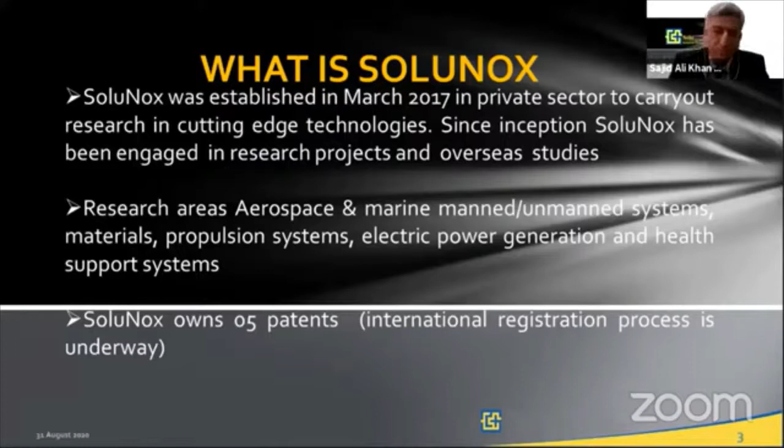SoluNox, before we started this process of establishing the company, we were stepping into cutting-edge technologies. So we had to design and analyze what all major companies in the related field have progressed, right from the scratch.

To do this, we studied and analyzed those companies, and collected a lot of knowledge sources: research materials, patents, online libraries. We also took membership of professional organizations, as I mentioned at the start of the presentation - member of the American Society of Mechanical Engineers, American Society of Testing Materials, and Royal Institute of Naval Architects UK. SoluNox is also a member of 3 committees for formulation of standards at ASTM.

Moreover, to strengthen our company, we have concluded some R&D collaboration agreements with universities, academia, and other companies across 3 continents. We have contracted technology partnerships, mainly strategic ones, based on sharing of our research together.

We are now registered as a supplier in some renowned aerospace directories, so that we have direct access to companies globally. Moreover, we have networked into industry also, because the type of industry we are working in at the moment needs a lot of precision and very dedicated design processes. So we have done this networking with companies.

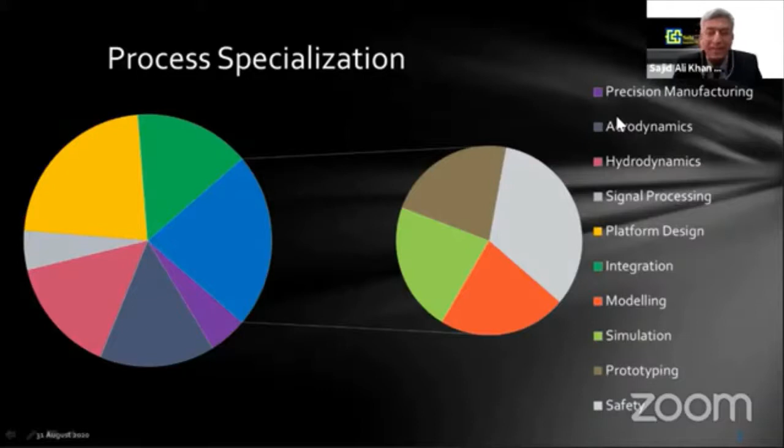In terms of technical specifications, our products are smart products. We have focused our attention towards propulsion systems, automation and control systems, and system integration. We have some process specializations because we involve precision manufacturing. We develop our expertise in aerodynamics, hydrodynamics, signal processing, platform design, integration, modeling, simulation, prototyping, and in the end, major part is the safety of all these systems.

Now, coming to your second part, how I started this process of aerospace despite being in the Navy and serving in submarines. Just for your information, I started my career as an aeronautical engineer, but somehow a turn of events took me to the Navy, and eventually I ended up getting commission in Pakistan Navy, then joining submarine service. The submarine service itself is a cutting-edge technology. So in a way, I'm working at the moment on 2 extreme technologies - aerospace and submarines. Rest in between is mediocre technology in that sense.

As for your question on how I came into developing gas turbines and everything - our study did not start all of a sudden. We have a team who have been working for quite some time, but in their own capacities in gas turbine technologies or aerospace technologies. Our main effort was to bring them onto one platform under SoluNox. But now, specifically for the turbines...

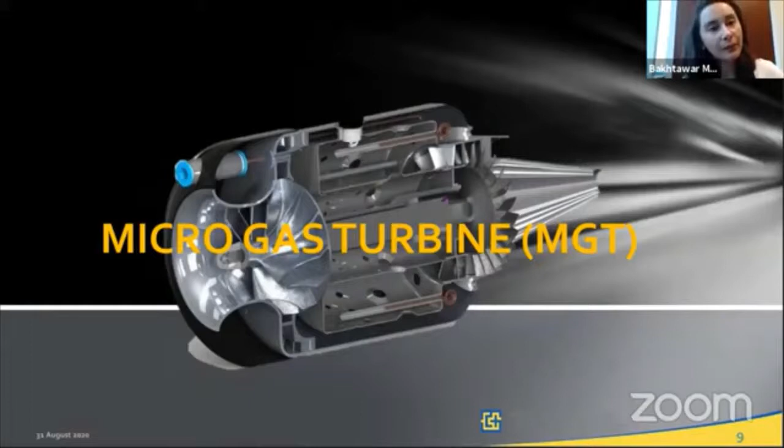Okay, just for the start, I'm sure all experienced from aerospace are sitting here, but as you said, some may not be related to this engineering background. Basically, a gas turbine is a heat engine with continuous flow. In comparison, reciprocating engines use pulsating flows. These turbines have a compressor, a turbine, and a combustion chamber, where heat is applied in different modes through fuel injection, and new methods are coming for adding heat to the combustion chamber. In this type of engine, generally they are mounted on the same shaft.

Micro gas turbines generally are mounted on the same shaft, and that is why they are popular in this part of the world of aerospace. At the moment, there is no standard definition of micro gas turbine. Initially it was considered that under 1 megawatt would be a micro gas turbine, but subsequently this definition was worked out further by many engineering associations and countries. So at the moment, a turbine under 400 kilowatts is graded as a micro gas turbine.

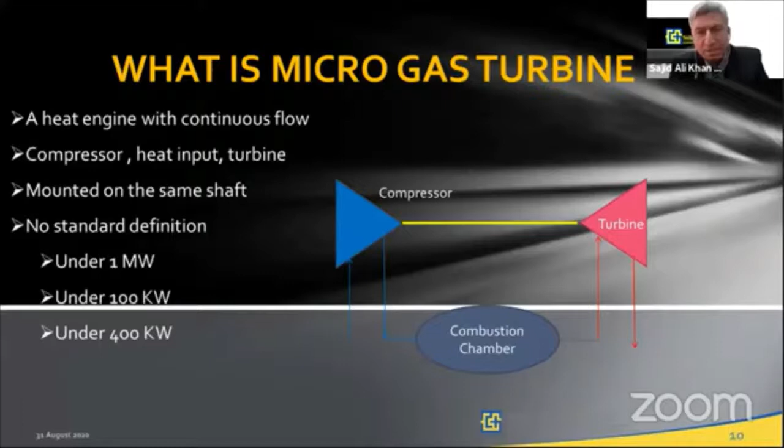And these micro gas turbines, you can see in the process cycle, follow a Brayton cycle. In this process, the compressor raises the air pressure, and from process 1 to 2, it is directed to the combustion chamber, where heat is added via fuel combustion through a heat exchanger or concentrated solar power. Heat is added, and then again in the turbine, at process 3 to 4, expansion takes place to produce power.

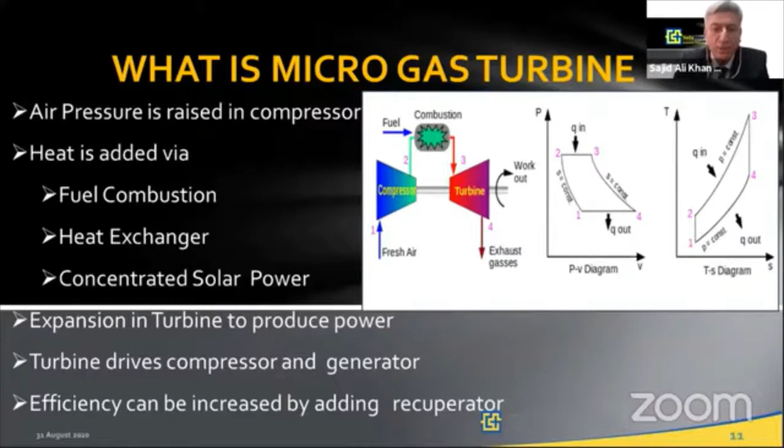This turbine drives the compressor and generator. The efficiency of these turbines can be improved by a recuperator on the return cycle, to increase the temperature in the combustion chamber so that economy of fuel can be achieved.

Now some of the historic perspective related to micro gas turbines. As I said during my presentation, development started in the 1980s. It is not a new subject basically. The drive for this development was the automotive industry, because at that time the automotive industry was looking for an alternative to reciprocating engines, mainly because of fuel flexibility, reliability, and low emissions in micro gas turbines. However, at that time, for some reason, this did not get attraction.

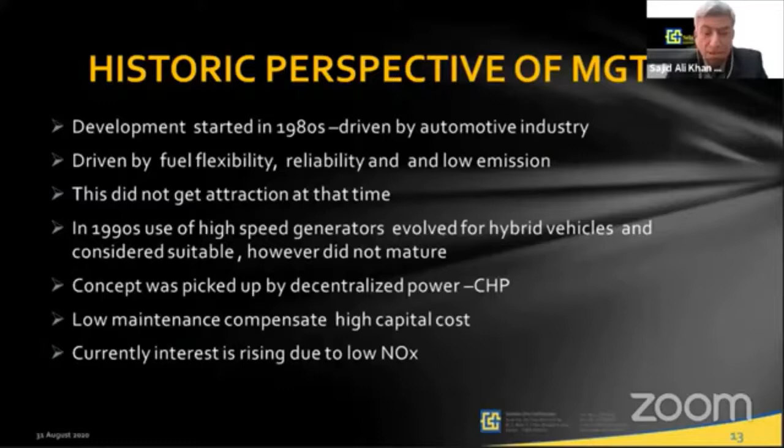But again in the 1990s, use of high-speed generators evolved, and interest also developed in hybrid vehicles, where it was considered suitable. Subsequently, the concept was picked up again for decentralized power in 2014, when the European Union and UNFCCC declared standards for low emission in the atmosphere. The important part of micro gas turbines is that they have low maintenance, which compensates for high capital cost. Currently, interest is rising due to low NOx in these gas turbines, and interest is developing now.

So the first design process starts from the Brayton cycle, and in this process various elements of gas turbine design are finalized, generally mass flow and the temperature ranges at different stations in the gas turbine. At the same time, selection of material is also done. Again, just for repetition, it is an iterative process, with continuous back and forth movement between the designer and the end user, until a suitable compromise is reached. And then you'll see that every micro gas turbine has some auxiliary systems.

This auxiliary system is again a process. It undergoes an iterative process during the design, and then engine control units control the complete process, because these gas turbines cannot be controlled manually for sure. So to make them smart and efficient, these engine control units are becoming smarter now.

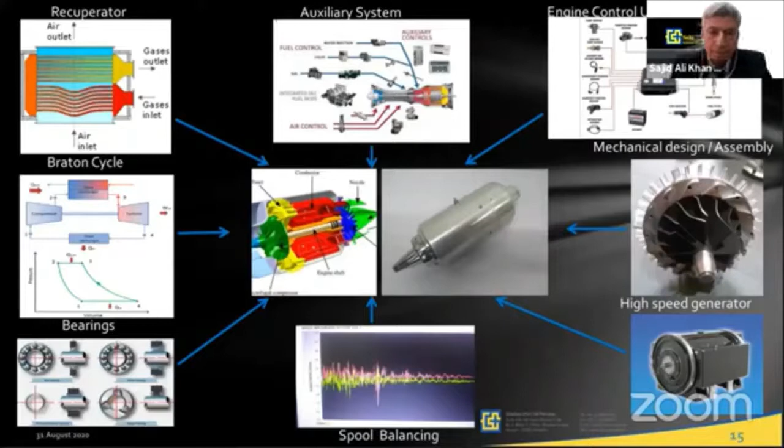Okay, now let's move to some of the parts which we manufacture in our facility.

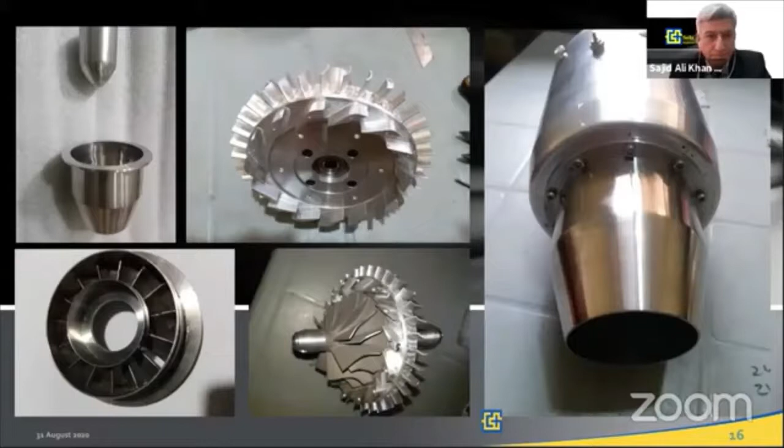These are two versions, SLX 120 NP and SLX 180 NP. They are 120 Newton and 180 Newton respectively. Our research is continuing, and we have plans to further improve these systems for relatively higher powers.

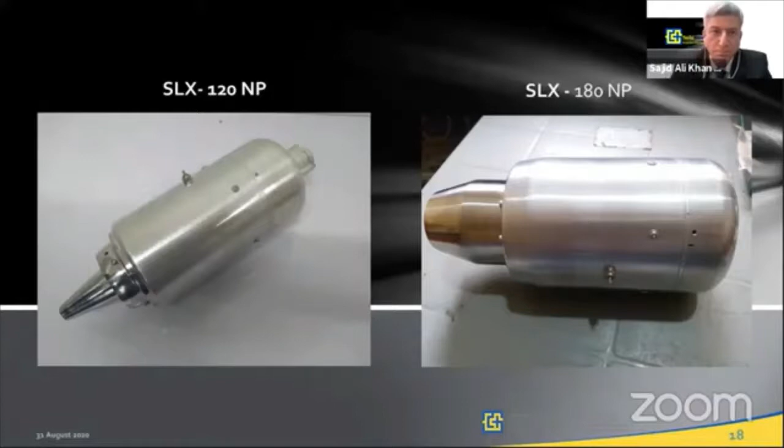You'll see our video running. These technologies are already matured enough, and we are running the engine, so our team, mashallah, has done enough good job on this—they can control it. So you were not using any kind of actuators in this process? No, correct. Please continue.

It is a thermal cycle. It is a thermal cycle.

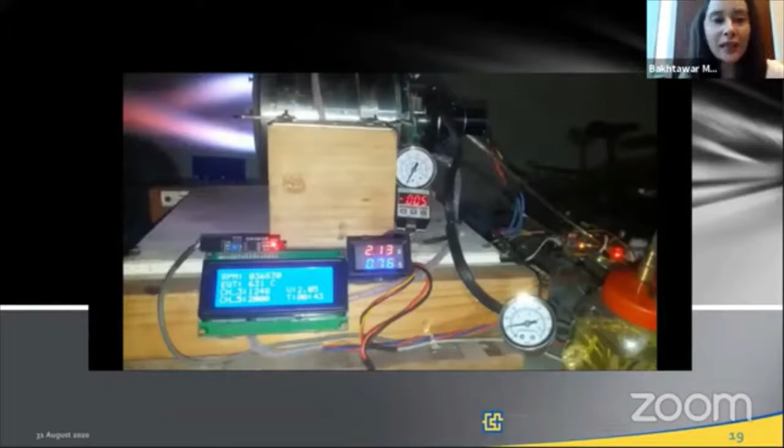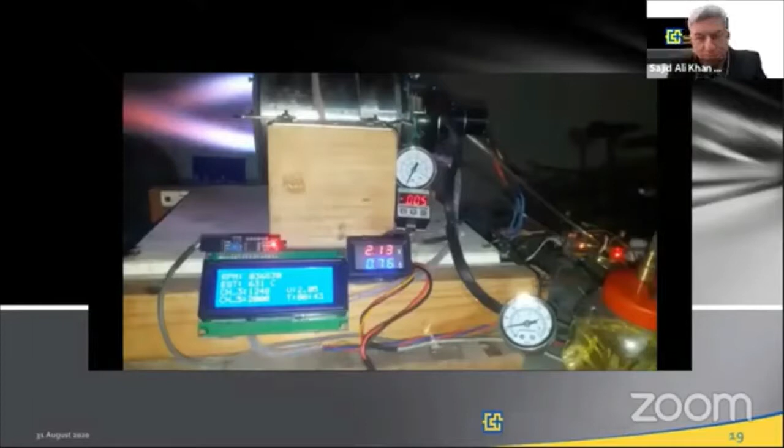Okay, so this is one of the pictures taken during a test conducted, and it is a running engine. You can maybe see the RPMs and the temperature in the digital display of this picture, and this is just the startup, not full power. May I move now? Next.

Now coming to technical specifications. We have developed 120 Newton and 180 Newton versions, and according to our studies we are planning to go to 800 Newton in the near future. We can have electrical output from 3 to 500 kilowatt electrical, thermal output from 3 to 1500 kilowatt thermal, and exhaust gas temperature up to 850 degrees centigrade.

We have fuel flexibility of using natural gas, sour gas, gasoline, kerosene, diesel fuel, biofuels, etc. We are targeting electrical efficiency from 23 to 40%, whereas total efficiency in CHP mode from 80 to 90%.

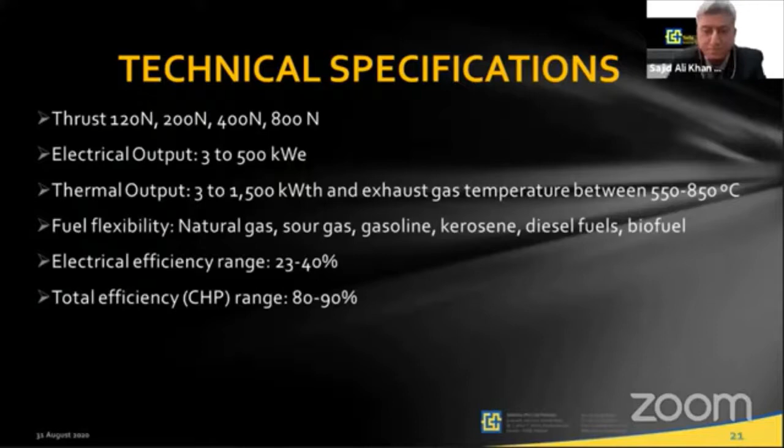Reliability and life: these turbines have been designed to work 40,000 to 80,000 hours with overhaul, and emission targeting below 3 ppm for NOx on fossil fuels comparatively—this will be our range. And the noise level we are maintaining is 50 dBA.

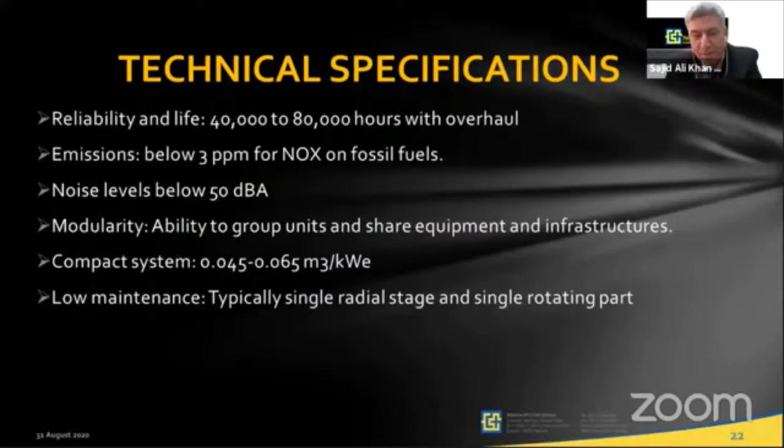These turbines are modular, and the infrastructure is also very modular, easily workable for maintenance. It's a compact system, 0.045 to 0.065 cubic meter per kilowatt electrical. These turbines are low maintenance, typically a single radial stage and single rotating part with no moving parts otherwise. Later you'll see the type of bearings used, where there is no lubrication needed either.

Reliability is high because there are very few parts involved in this gas turbine, so it is very reliable and robust. Compactness comes from the high energy density, use of high-speed generators, and the turbine itself being a very small, compact system to develop modular power up to 50 kilowatts. You can stack up various modules to develop power in multiples of 50 kilowatts.

These have fuel flexibility, and diverse fuels can be used, from jet fuel, diesel, and biofuel. This is the most interesting part in the European Union at the moment, trying to use biofuels. But at the same time, their consumption is low because the NOx emissions are very low, so even on diesel also they are considered very low.

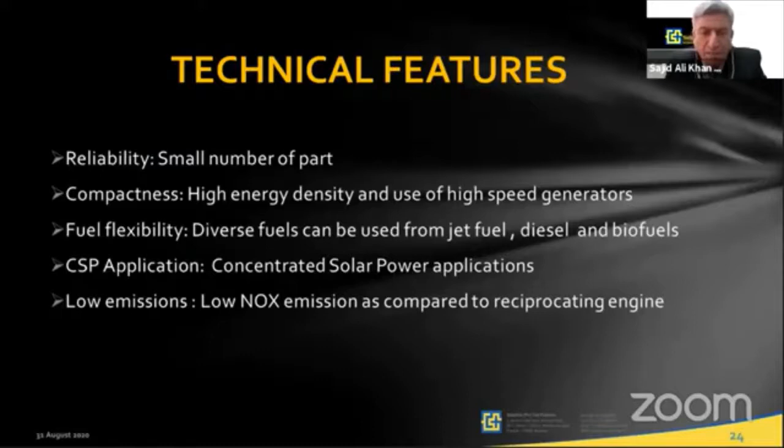Another application for the audience is CSP, concentrated solar power. In this application, a dish is used to direct sun energy onto the combustion chamber to give heat to the turbine. These are low emission turbines, low NOx as compared to reciprocating engines. That is one of the reasons why the European Union and the world are moving towards micro gas turbines, even in renewable energy solutions.

They are low noise. The combustion noise is very low compared to reciprocating engines. This is a very high frequency noise, and it can be attenuated relatively easily. They also have low vibrations compared to reciprocating engines. CHP mode can be used for high heat and low electrical power, or vice versa — it depends, because in this mode you can choose between the two. You want heat load more, or you want electrical load — you can adjust accordingly to meet the requirement of the end user.

There's another application: integration with fuel cells. In integration with fuel cells, the byproduct heat is used to heat the solid fuel used in the fuel cell.

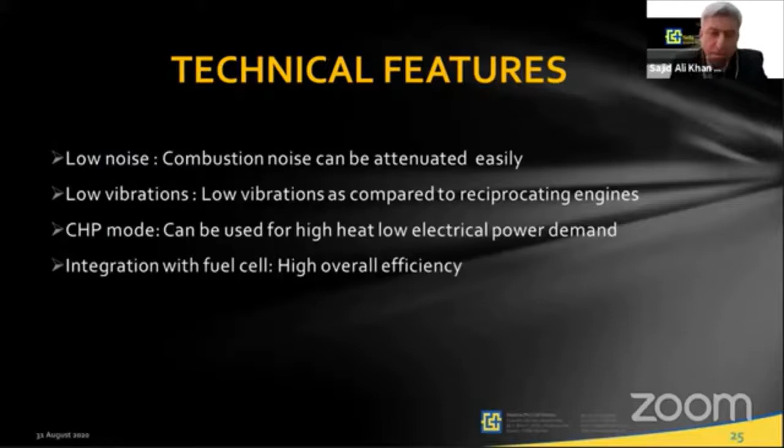The applications are combined heat and power, combined heat and cooling, and heat power for domestic and industrial uses, and automotive range extenders.

In hybrid vehicles, the batteries were not considered enough for long endurance, so micro gas turbines are being used to enhance the range of hybrid vehicles. In future, these are going to be used in Europe for train and rail transport.

In the oil and gas sector, for preventing flare, normally gas is continuously vented into the atmosphere. The European Union has banned this venting of flare into the atmosphere, so micro gas turbines are being used to produce heat and electricity using that gas also. So this is another application.

Concentrated solar power, as I said, uses solar power concentrated heat on a combustion chamber, combining solar energy and gas turbine.

Moreover, one of the popular uses is in small UAVs and APUs, another area where these micro gas turbines can be used. And again, due to their minimum size, these are being adopted as backup power energy instead of batteries with renewable energy plants.

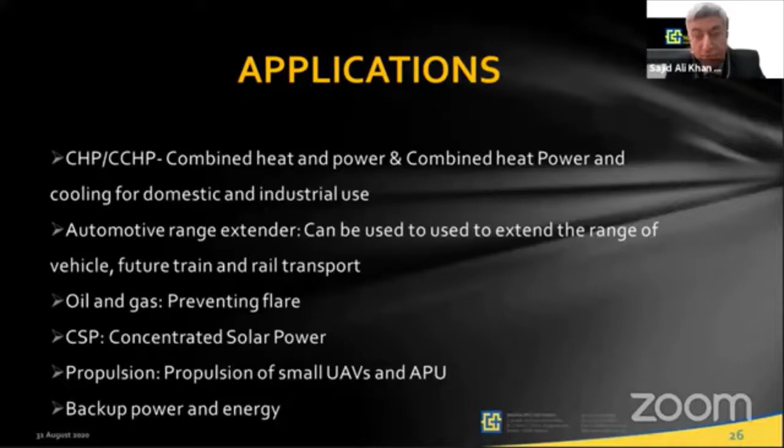So you've spoken about the micro gas turbines. So what other products is your company actually working on that have export level potential?

My next few slides would indicate some pictorial views so that you can have an idea what we are actually developing beside this range — a high-speed target drone launching system.

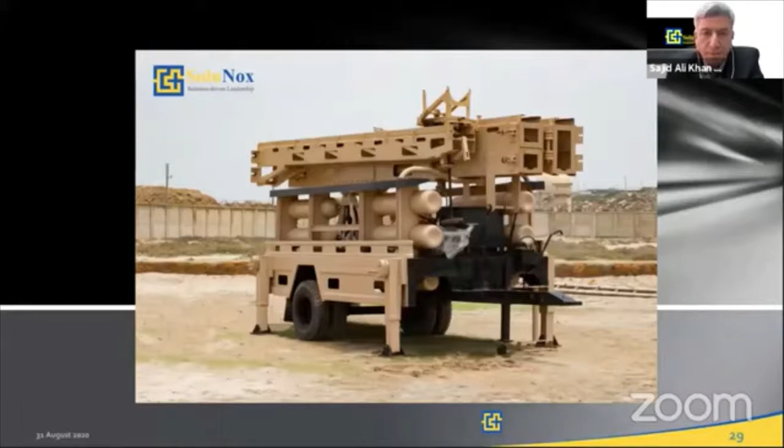This is the system which has been designed and developed in Pakistan. The picture you are seeing at the moment is the transport mode, in the folded state where it can be transported. In the next picture, you will see the deployed state — the system in its deployed state.

The system has the capability to launch masses up to 150 kg with a speed of 55 meters per second. The weight of the launcher is 5,500 kg, easily deployable with a 16 meter length, and it has a transportable length of 6 meters, so it can be easily transported in a 20 feet container.

This is being operated with high pressure air, 150 bar, and can be deployed at sea and on land. This system can launch and deploy UAVs with force up to 15 Gs, controllable using our system.

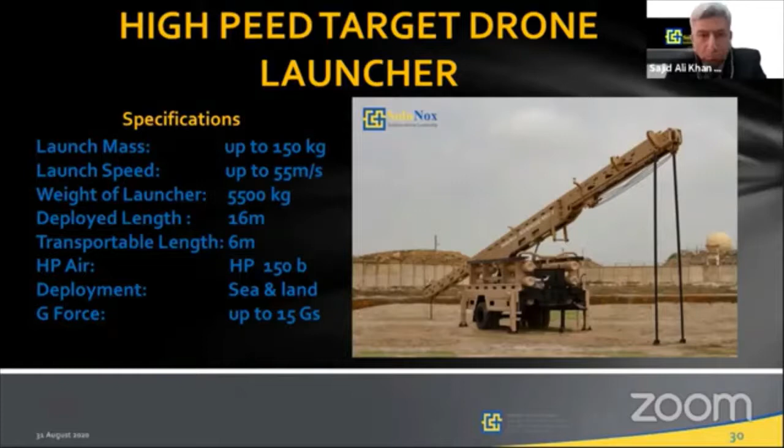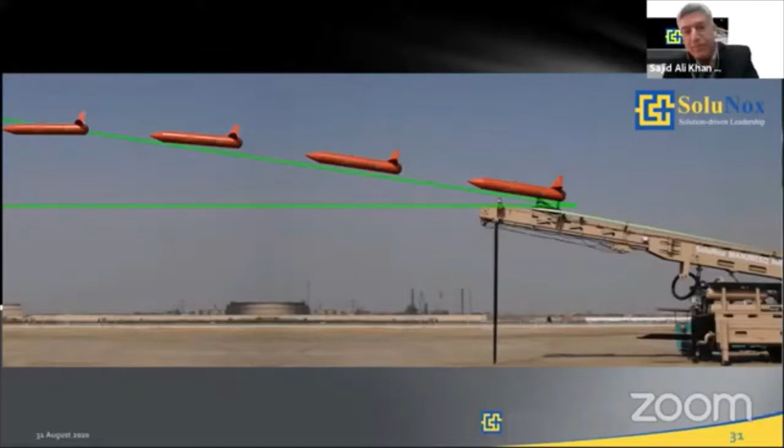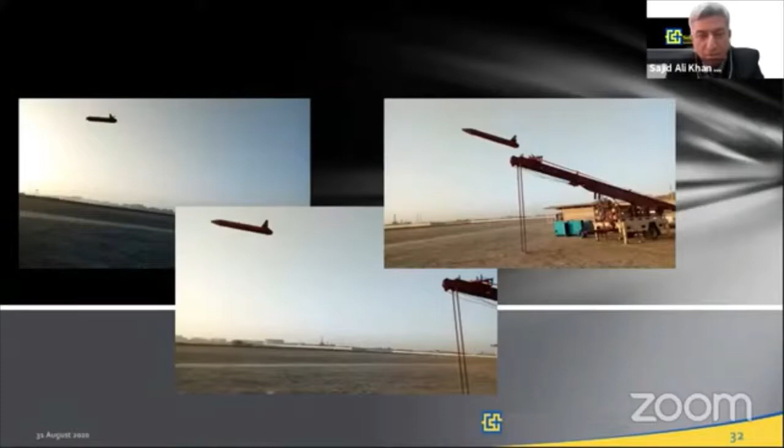We are now looking at high-speed target drone systems for training pilots and for various commercial uses.

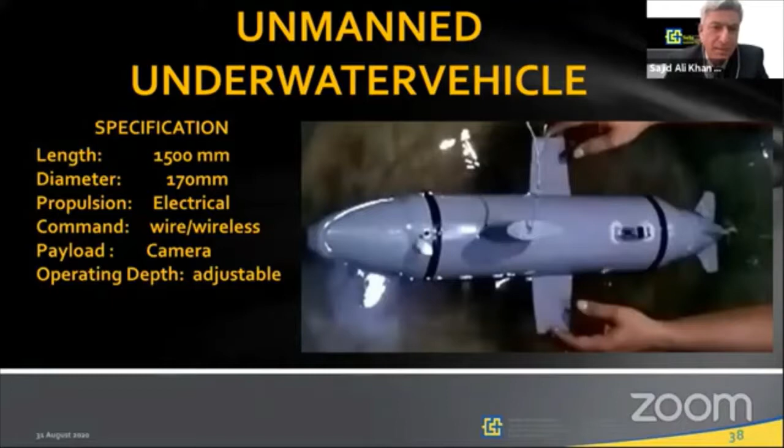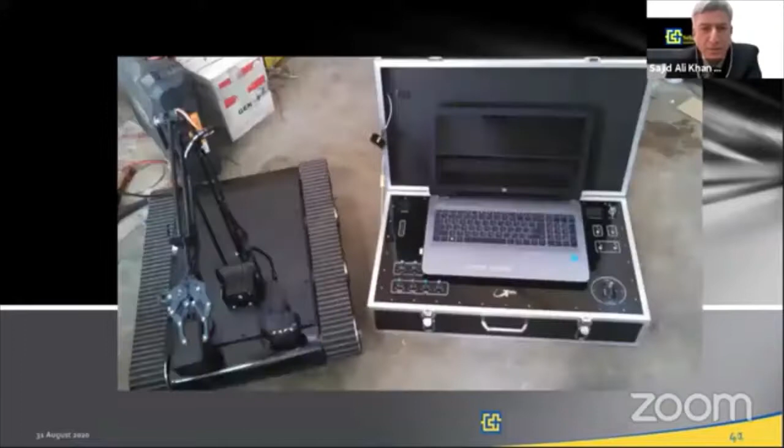This is another unmanned ground vehicle, a robot manufactured at our facility.

This is autonomous. It also has a camera for surveying and other activities.

It can manually handle and pick up things during disaster surveys of damaged areas, such as during fire or flooding. This autonomous robot can give feedback to the end user, to the system.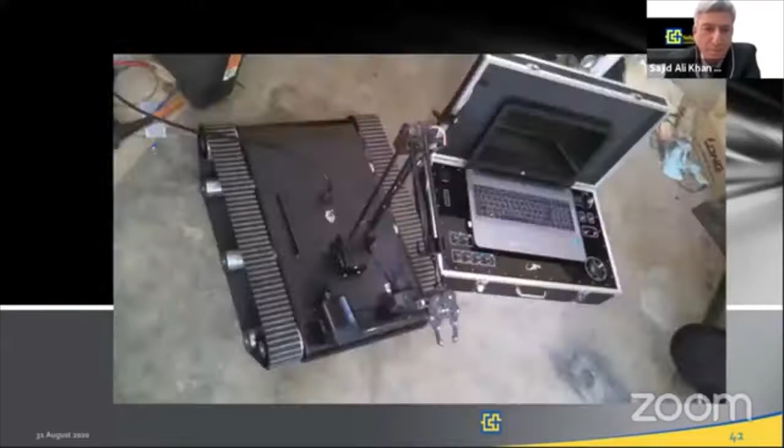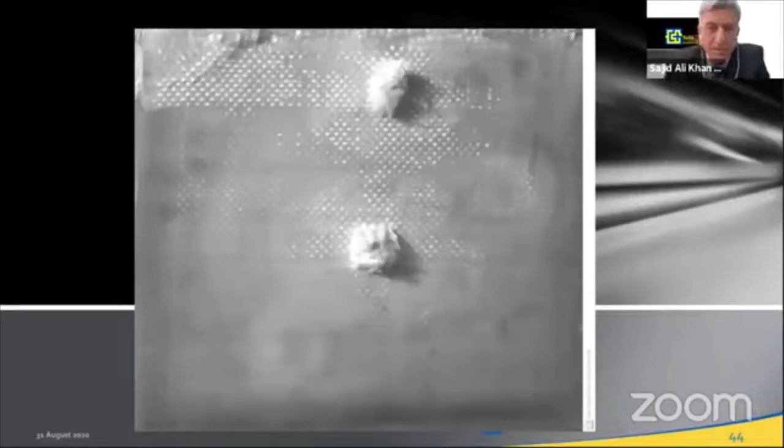These are lightweight, high-strength materials being developed. Research was done, and alhamdulillah, we have successfully developed them.

Now you can see the material used to protect against high energy bullets. We have developed this locally.

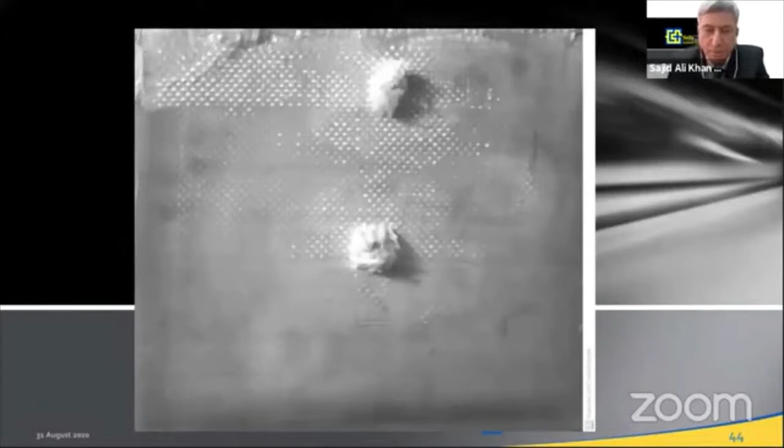You can see how the bullet has been prevented from penetrating. This is the front end.

We are also into some precision manufacturing. We develop connectors, and you can imagine the accuracy required for these types of connectors.

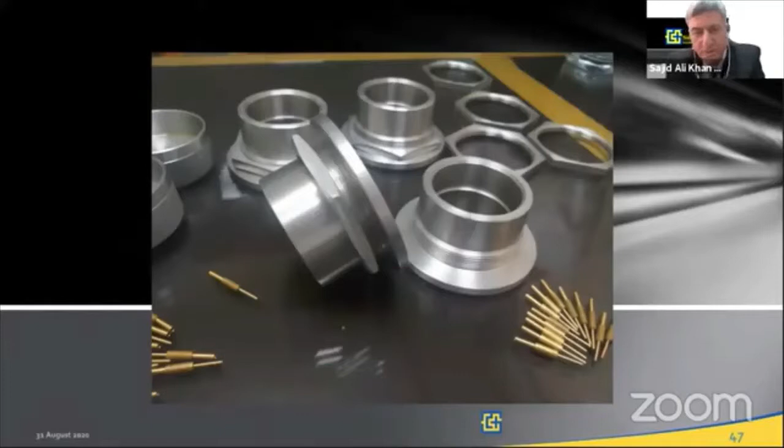Okay, alright, maybe just... Sir, what is it? Yeah, sure, okay please.

I would like to ask basically what is the potential market you see for all your products, and what are the export capabilities?

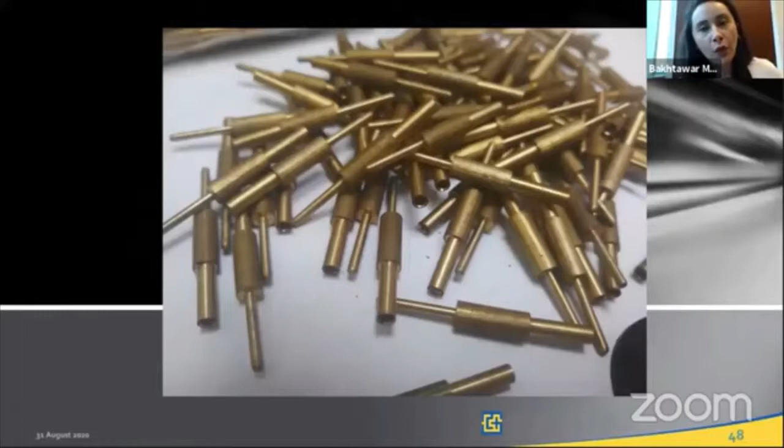Frankly, we are at the moment targeting Central and Eastern Europe, Canada, South Asia, ASEAN, Gulf, and Central Asian countries. In Africa, some countries have shown interest in us, and Pakistan of course.

These countries have shown interest, and for this we have participated in a few exhibitions also. So we have received quite a good, encouraging response from these countries.

Regarding export capabilities, all our products, such as the micro gas turbine, high-speed launching systems, and automatic disarming system, are export capable.

This one I've not displayed here, but we may show you a video of this system. This system can disarm expired ammunition, which can be dismantled automatically.

Our high-strength materials have produced very encouraging results, with some companies showing interest in bulletproof jackets and materials, and high performance.

Actuators for pneumatic systems, and for the automobile industry, we have some offshoot technologies coming out of these products applicable in the automotive industry.

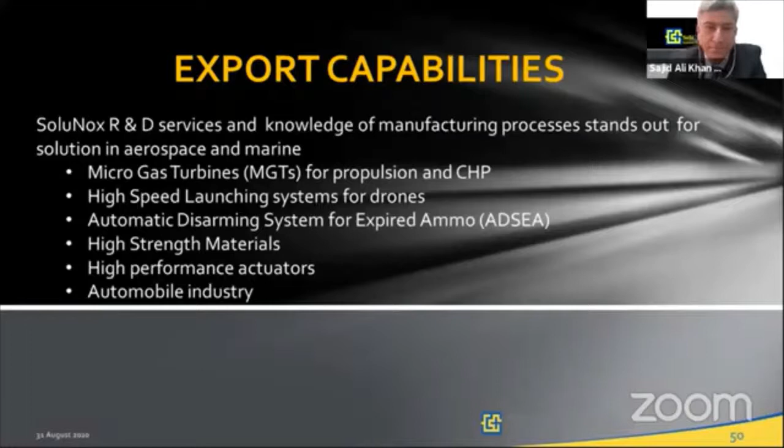So Sajid, what is the future outlook of SoluNox, and what is your advice for venturing into new technologies in Pakistan?

Frankly, in the future outlook, we see raising the capacity of these micro gas turbines, and in the CHP mode, because this is going to be the future of the world.

Maybe in Pakistan it may take some time to reach this level, but Europe and the Americas are focusing on it. Even Japan is focusing on these technologies.

So we are targeting these countries, and that is why we have developed our trajectory towards these technologies. And then we have high-speed launching systems.

Targeting the European and US markets, and unmanned systems from ground, air, and underwater systems.

We have UAVs for agriculture used with IoT, and we are targeting hybrid power for high-performance marine platforms, innovative transportation systems, and indoor building positioning systems.

And protection against EMC, EMI, fire, and water. These are a few areas, as they are offshoot technologies of our research done so far.

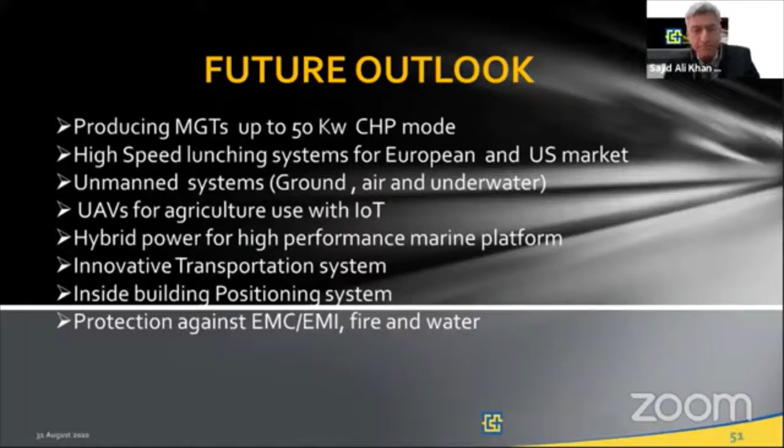So Sajid, moving towards the end of my question to you regarding the presentation, how can the government of Pakistan help SoluNox, and what examples exist in other countries for supporting such technologies?

In fact, SoluNox research is ready to lead Pakistan towards cutting-edge technologies in the power and energy domain. Our entire effort is exactly aligned with the government's vision.

So we expect, since we are already aligned, that the Pakistani administration will develop an understanding of low emission or low NOx technologies and other related areas.

They may like to come up at later stages, but at the moment, we at SoluNox have already developed these future technologies in this time period.

So what we are expecting from government or public sector organizations, if they want to avail our expertise in these technologies, we are ready to give our expertise gained so far. Technologies can be an ecosystem, and we can help government organizations develop this ecosystem in Pakistan. Importantly, it should be beneficial for both parties. We are a private entity and have used all our own resources. As I mentioned, even the European Union invested 1.6 million euros just for a study to develop gas turbines, whereas SoluNox used its own resources to carry out this research, and today we have reached this level.

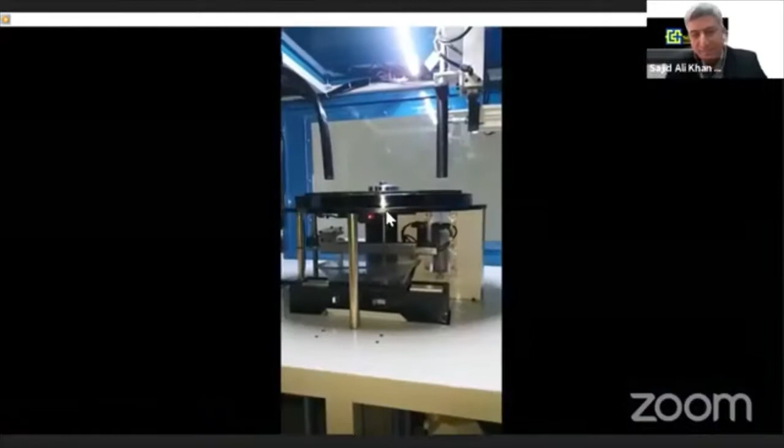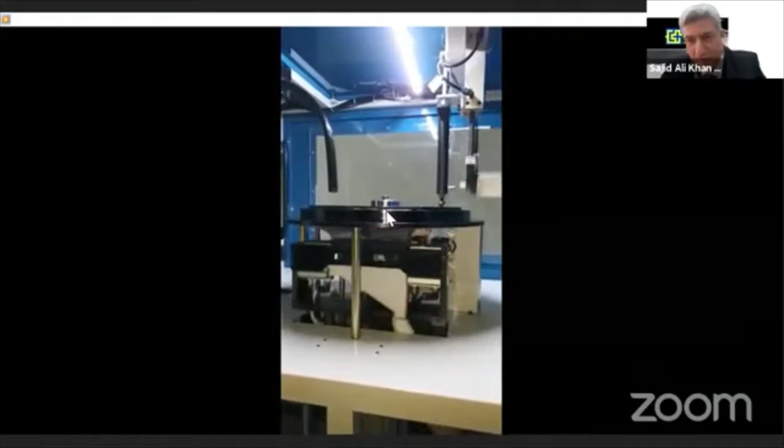This is one product which we did not discuss in the presentation. This is an automatic system, totally designed and manufactured by our young, talented engineers. This system dismantles expired ammunition automatically with just the click of a button.

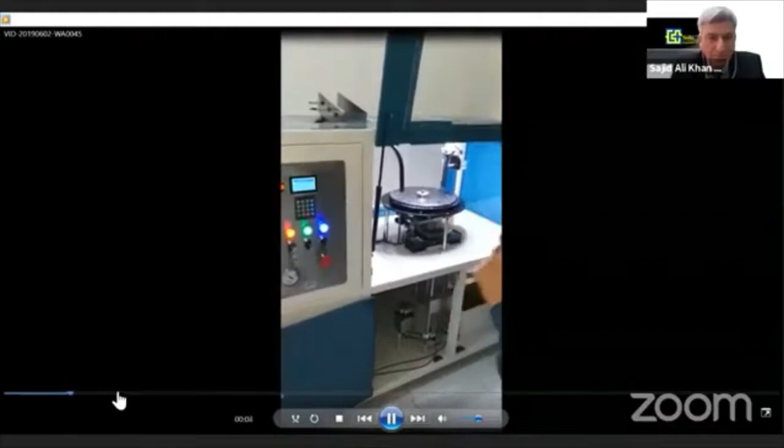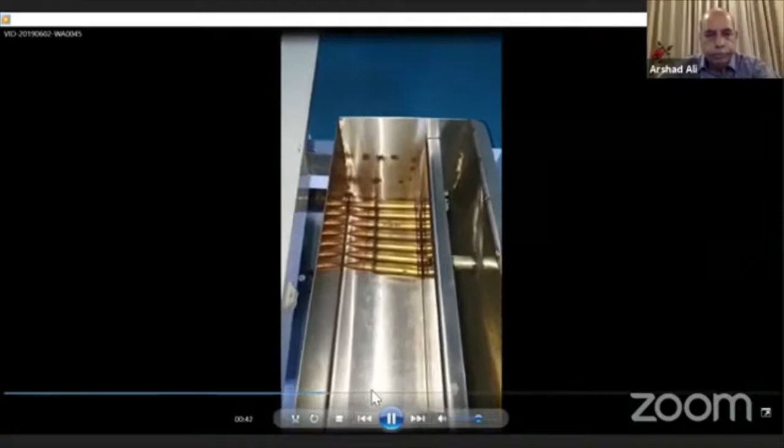So is this the same device that you were showing us? Sorry, is this the same instrument? Same, yeah. Maybe it... you can go to the next video.